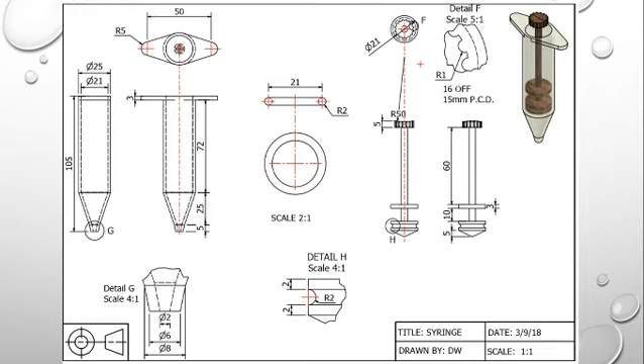Okay, with that we'll move on. Our task was to come up with a model plan, and this was mine. It looks a little bit rough and ready, but that's what model plans are supposed to be. They're not supposed to be perfect works of art.

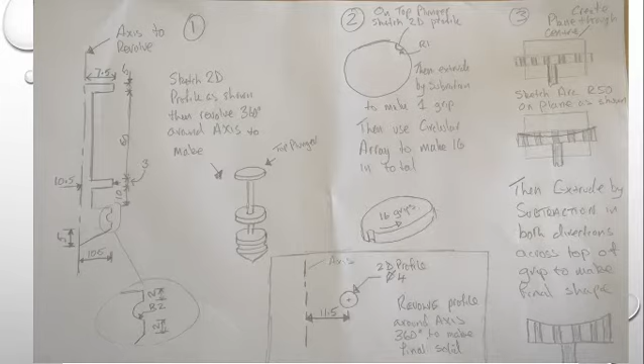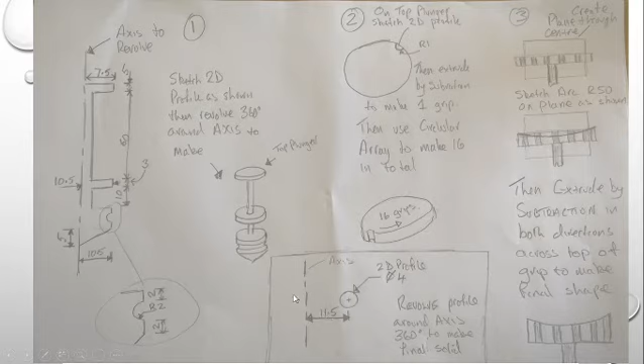There is a slight little error in mine. Those that are a bit sharp-eyed will see that this diameter down here isn't quite right, and I'll come back to that as we go through. It just goes to show that we're all human and we all make little errors.

Let's look at it in detail then. It's a plunger we're aiming for, and here's our shape with the various diameters and heights on it. One thing that was missing was the distance between here and here, the diameter of this connecting rod, and that was my mistake. I never put it on, but I made an assumption that it looked like about 5 millimeters, so I made a little guess on that.

First thing to do is, do we have all the information that we need? Well, we've got all the heights because I can see them here. I've got a detail view down here which enlarges this part, so if I need the height between here and here, I can see that's 2 millimeters. This little fillet part, the little semicircle, has got a radius of 2, and bearing in mind Inventor likes diameters, that will be a diameter of 4 when we come to actually do it. I've got all the various heights.

The only thing you perhaps looked at and thought was missing is the diameter of this top part, the diameter going from here across to here. Now it's not missing, but it is a little bit tricky to work out, and to find it you had to go to this detail view.

What that says is these little grips here have got a radius of 1 millimeter. There are 16 of them, and this is the important part, they're on a 15 millimeter PCD. What PCD simply means is that the centres of these little circles going all the way around are on the diameter of a circle which has got a 15 millimeter diameter itself. So imagine this without the little cutouts, without the little grips, we've got a 15 millimeter diameter circle.

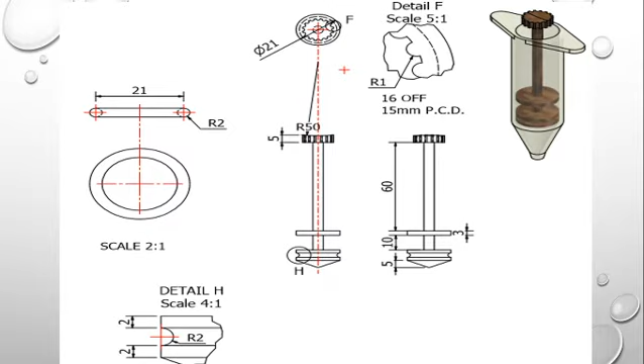Now to do this, I immediately thought about doing a revolve. It's possible to do it in other ways, but it's a bit more complex. I did this using just 3 3D commands, which is about as efficient as I think it could be. So let's have a look and we'll see how I did it.

What I did was took a sketch of half of it. And I took all my sizes from that previous drawing, so everything that's on here is pretty much as it was on the other drawing. The only bit that I've done is I've included the 15 millimeter diameter circle at the top. So I've included that in my sketch.

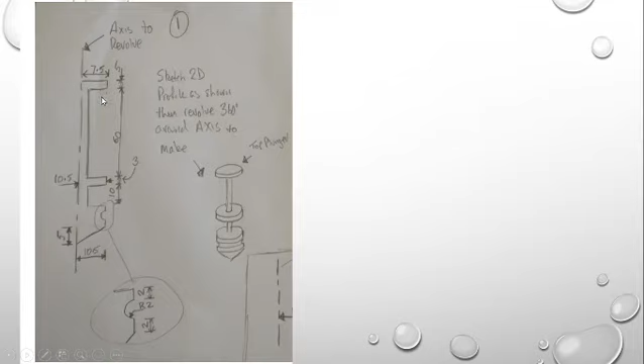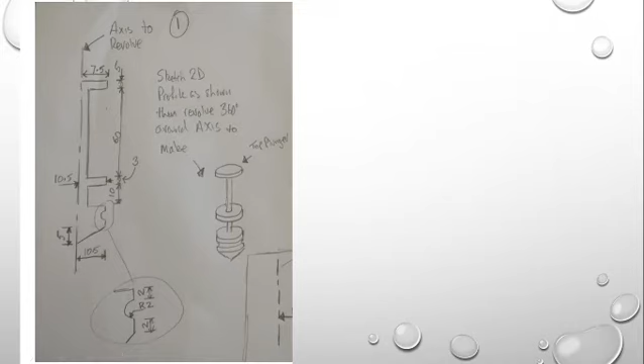But whenever I got responses back from people, what they had done was stop short. They hadn't done that part there. They had stopped here and their sketch stopped at this point and simply went across. So I thought, just to make it obvious that you can do it that way too, when I came to do my Inventor sketch I did the same thing. You look over here, you'll see that my sketch done on Inventor matches what happens over here.

Once again, we didn't have the diameter of this central connecting rod, but I made the assumption that it was going to be a 5mm diameter, which means it's going to be a 2.5mm radius, and we can see that up there. I've got my little 2mm radius there, but remember Inventor works on diameter, so I'd have to do a 4mm diameter circle. Everything else which is on there I got straight from the sketch.

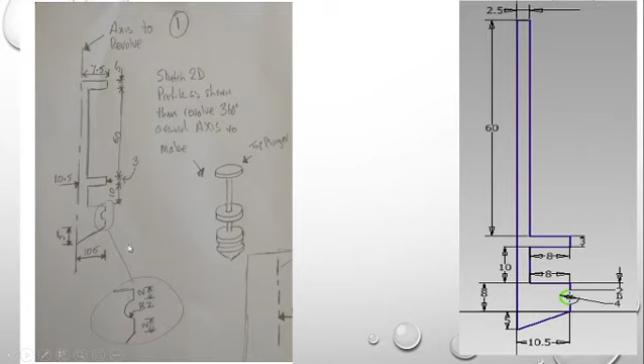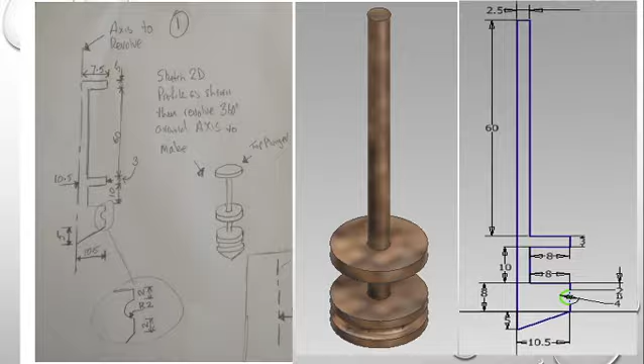Which means I need to create that part now. So you would have to have then done a little sketch showing a 15mm diameter circle being sketched directly on top of the centre of this face. And it's important that you say it's in the centre of that face, because you could put it off to the side somewhere. So make sure, if you're doing it that way, that you indicated that it would be in the centre of that top face.

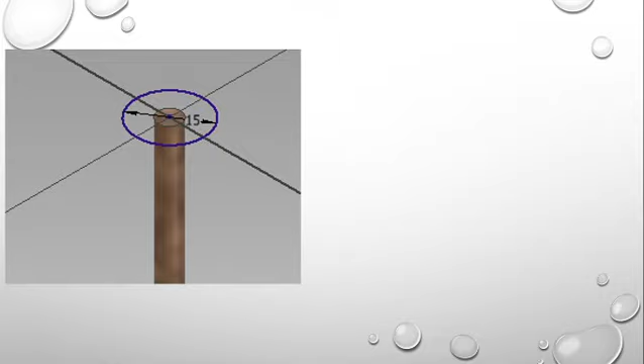Once you had done that, you would then go on to say that it would be extruded by 5mm, and that would then give you that part there.

What we have to do now is figure out how to do the grips. I kept it nice and simple. I said that this is on top of the plunger. Sketch a 2D profile like this, and I've got a little arrow saying radius 1. Remember, it's not supposed to be to British standard, these dimensions. You can put them on any way which communicates effectively what you need. You wouldn't get marked down because it's not British standard.

So I've said put that on there. Then extrude by subtraction to make one grip. Now I think I've made it quite clear that that's going to be subtracted all the way through from one side to the other to make one grip. To make it crystal clear, in case someone was looking at it and thought that's not quite what it's supposed to be, I could say extrude by subtraction 5mm, because that's how thick that little plunger bit is at the top. But I think I've made it fairly clear that if I extrude by subtraction, I make one grip.

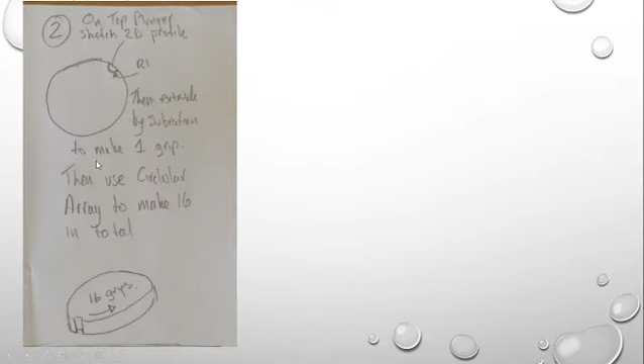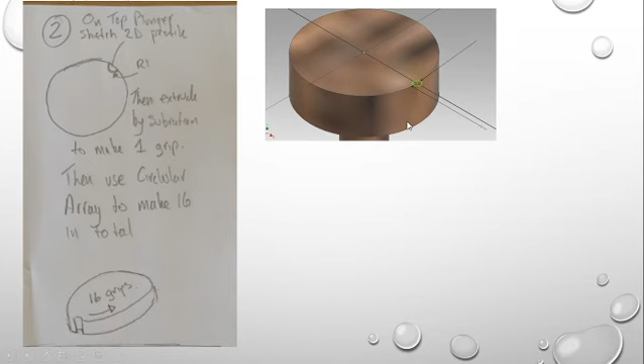Then use the circular array. That's the Inventor term we need, circular array, to make 16 in total. So what does that look like? Well, there's my first little profile there. And then if I go to the array, there's the one grip.

And then I have my additional grips going all the way around. If you look at this dialog box, we can see that it's 16, and they're going all the way around, it's 360 degrees. And what does that look like at the end? Well, it looks like this.

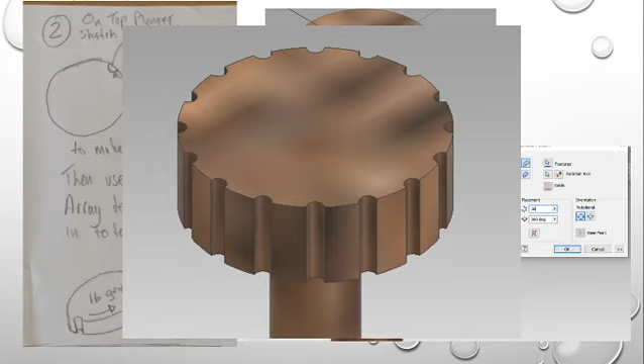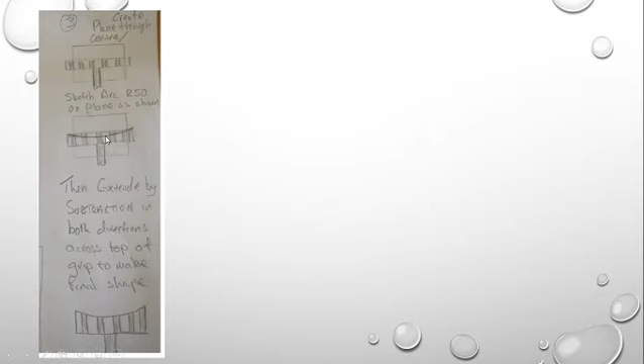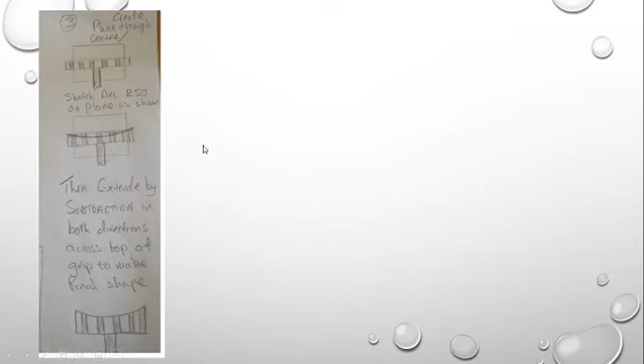Pretty much done now, last bit, tiny little bit tricky. What we have to do is create this little place where your thumb would sit on top of the plunger. This is where Onshape's a little bit different. Onshape allows you to put a sketch directly on the side of this circular shape and put a sketch on it. Inventor doesn't work that way though. In Inventor you can't put a sketch directly onto a curved surface.

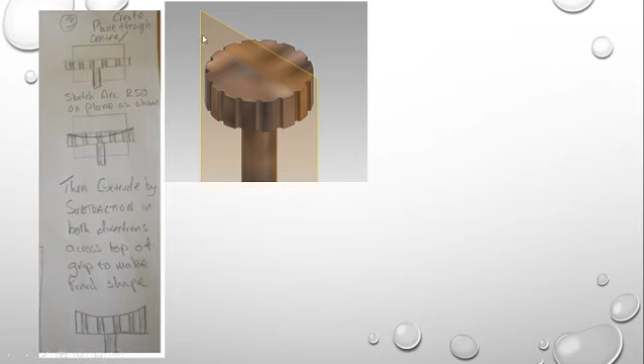Two ways of doing it. One way is that you could create a plane which is on the edge of this so that it's just touching it. Or the way that I did it was I opened up the origin and found one of the planes going all the way through the centre and made it visible. Now that I've got this visible plane, I can create my sketch on it.

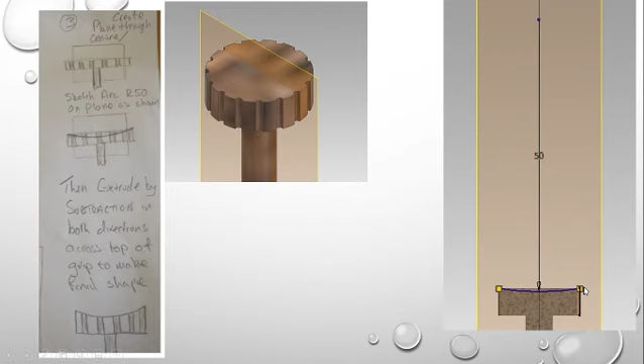And my sketch looks like this. I sliced the graphics down here so that you can see the curve. Remember, F7 on your keyboard for Inventor will slice the graphics so that you can see the sketch. The arc goes from one side to the other and it's got a radius of 50mm, which is exactly what it said on the drawing.

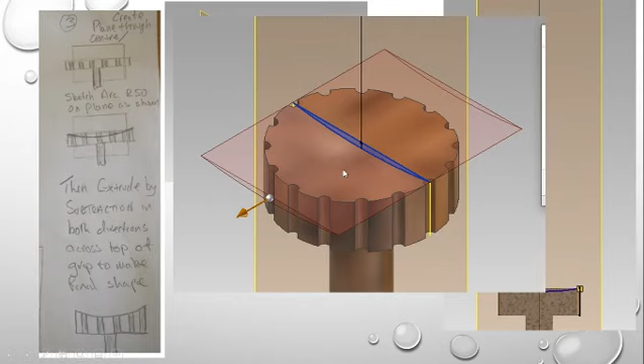What do I do with that now? What I have to do is extrude it by subtraction, and I did it in both directions, so I'm extruding that way and that way. All I did was put in 10mm in each direction, 20mm in total, and that ensured that I cut all the way past the edge. And that gave me that, which is what I was looking for. And at that point, that's the plunger finished.

The last thing you had to do, if you had time, was to create the little seal, the circular thing that looks a little bit like a tyre.

To do this, it's a nice simple revolve. Now this is where I made a slight mistake. That should be 10.5 millimeters in there, not 11.5, because the diameter is 21. If I put that in, my diameter would be 23, which would be too big.

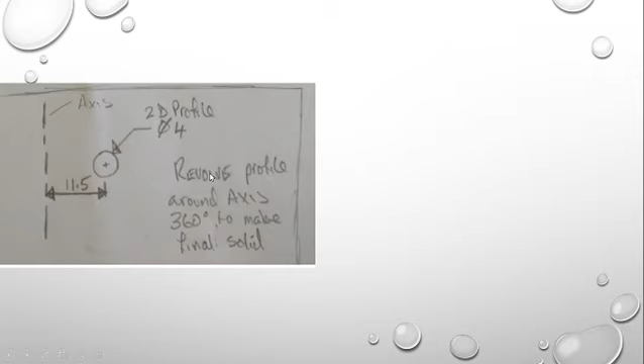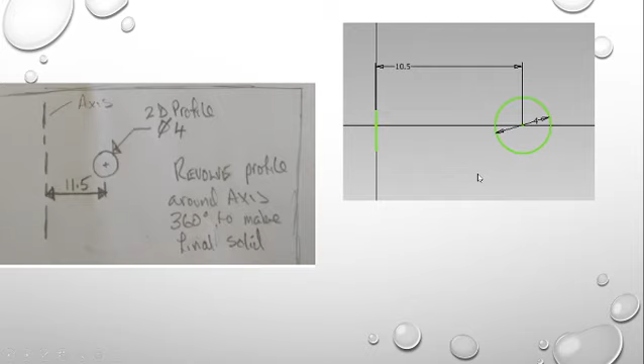So I've sketched the profile, said it's diameter 4. I've got my axis of revolve over here, and I've got my correct distance from it. Well, obviously this one isn't correct, but I would put my correct distance, and I'm going to say revolve the profile around the axis 360 degrees to make the final solid. There's what it looks like on Inventor. I put the correct size on Inventor. There's my 4 millimeters, and there's the final shape.

Now, one person who gave me a response back, they did it slightly different. What they created was 2 circular profiles and then used the fillet command to curve it off, which was quite a unique way of doing it, but it was a little bit more complex, and I think probably the simplest way to do it is doing this revolve.

Hope that's been helpful to you. That's what model plans should look like. They are supposed to have the sketch sketched. You don't have to indicate every single command for the sketch part of it. But when it comes to the 3D model command, that's when you have to be quite clear about exactly what command you're using and what you're doing with it.

The sketch part, simply take the sketch from the drawing that you're working from, resketch it, and say what you're going to do with that sketch at the end. Hope that's been helpful, and next one we do will be slightly more complex.